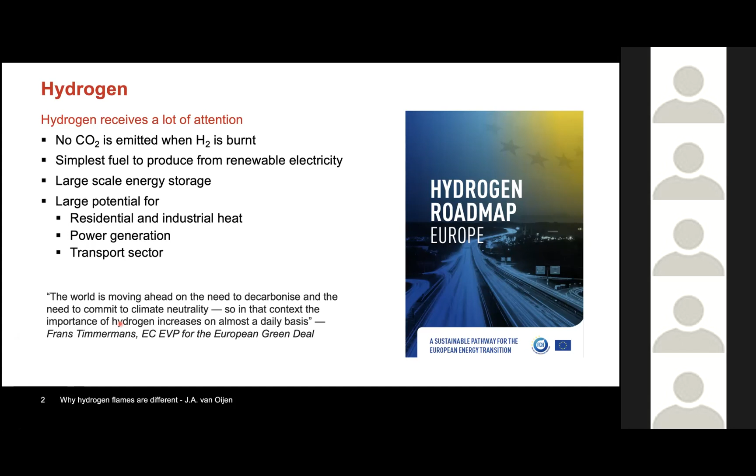His quote is down there on the slide - let me see if I can use the laser pointer - saying that we need to decarbonize and go towards climate neutrality. Nice words, and the importance of hydrogen seems to increase on a daily basis. Even last week, the Dutch government announced their plans during Prinsjesdag, last Tuesday. You must have heard it if you live in the Netherlands.

In these plans, they have reserved quite a lot of money for hydrogen. There's a 750 million euro investment in the hydrogen backbone, so that we can build a big gas grid suitable for hydrogen, and lots of other money for electrolysis and for hydrogen storage in salt caverns. So it's picking up speed.

And of course, I don't have to explain that hydrogen receives a lot of attention, because if you burn hydrogen, you don't emit carbon dioxide. Of course, if you make it, you may produce carbon dioxide, so I have to consider that. But it's probably the easiest fuel to produce from renewable electricity, and therefore it's considered to be a good way to store energy. When the sun shines during the day, we hardly need electricity, so we can convert that into hydrogen and then use that for energy storage.

And hydrogen then has a huge potential. The use of hydrogen, of course, for industrial heat, high temperature processes, but even for residential heat where electrification is somewhat harder. Power generation and the transport sector, of course - planes, trains, automobiles, maybe. All of those could benefit from the use of hydrogen. So that's why we might do hydrogen combustion.

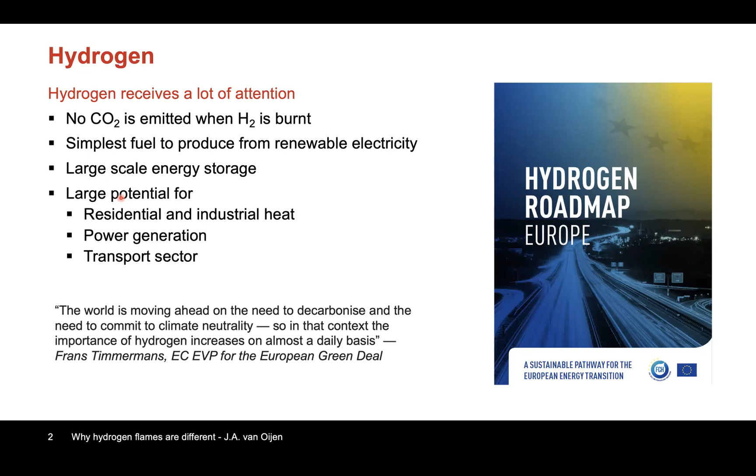But that was not the main topic. My buttons do not work. So, okay, this works.

Using hydrogen as a fuel, or as a partial replacement for fossil fuels - think about natural gas or methane - is a good idea, because then you can reduce the CO2 emissions per unit of energy. However, burning hydrogen is not that straightforward, because current existing combustion equipment might not be suitable. You cannot just simply replace that. Like a diesel engine, you cannot just pour in gasoline, and the same holds for a device that's designed to burn natural gas - you cannot simply replace it with hydrogen. I guess you all know that.

Some basic properties of methane and hydrogen as fuels are listed over here. Of course, their energy content, which is way different - hydrogen on a mass basis has a much higher energy content. However, it's also much less dense - density is much lower than methane. So on a volumetric basis, the heating value of hydrogen is actually lower than that of methane.

Three times as much. However, you also need much more air for methane than for hydrogen combustion. And actually, if you compute the energy content of a stoichiometric mixture, then it's about the same for both on a volumetric basis - so the same cubic meter of fuel-air mixture contains about the same energy. However, the ratios of fuel and air are completely different. So you can imagine that combustion equipment needs to be modified for that.

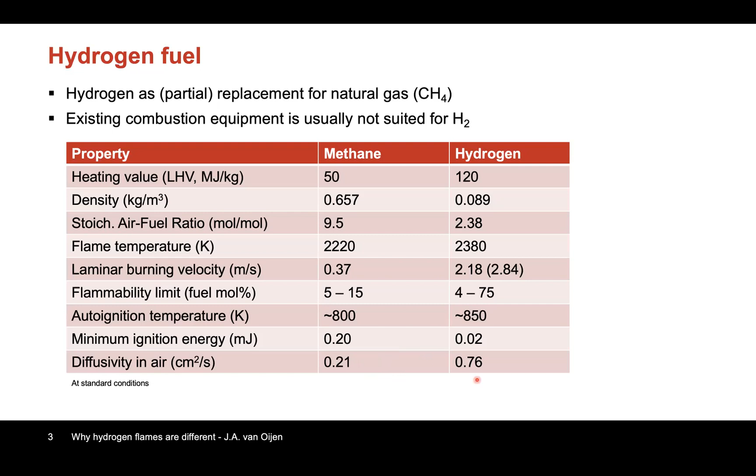So I'll keep struggling with this. Yes.

The flame properties, I mentioned already temperature and flame speed, and these are the main properties for premixed combustion, because these properties depend on the fuel equivalence ratio, the ratio between fuel and air. Highest temperatures occur near stoichiometric conditions, and it's about 150 K higher for pure hydrogen. But that's good, high temperatures mean high heat transfer.

That's nice for some processes, but of course, high temperatures also cause high NOx formation rates, and that's not nice because we don't want NOx emissions.

The flame speed is also vastly different, as I already said. Here you see the measurements and modeling results for the laminar burning speed of hydrogen, methane, and a mixture of hydrogen and methane. What we see is that we can burn hydrogen much faster, and that's nice because if it burns fast, you can produce a lot of power.

So a high power density. In a small volume, you can convert a lot of fuel. However, it results also in flame stabilization problems. Keeping the flame where it's supposed to be, that becomes the trick.

We will look a lot at mixtures with 40% hydrogen, and you see that that already enhances the flame speed, but it's not linear. 50% will be about here, and then there's suddenly a big jump. So above this percentage, the combustion properties really start to change, although 40% is already showing a lot of different behavior.

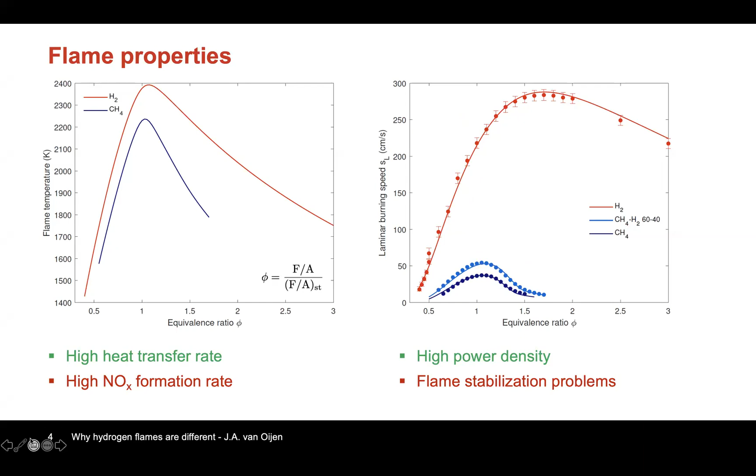Yeah, this is also a classical slide, but I think it's good to show you anyway. There are always many ways how you can burn fuels.

There are typically two modes of combustion: non-premixed and premixed combustion. In non-premixed flames, the fuel and oxidizer enter separately. What then happens is that you have to mix the fuel and air, and this mixing is rate determining because the chemistry is extremely fast. You get a flame front where the stoichiometric ratio occurs, high temperatures happen there, so we get high temperatures and therefore also high NOx formation rates.

So typically this process is a bit slow because it's mixing controlled, and it's also very hot, and therefore we have long residence times, high temperatures, lots of NOx.

So very often what we see nowadays are premixed systems. In premixed systems, you can mix the fuel and oxidizer beforehand, and therefore you can get conditions where the ratio is lean, so we have an excess of air. We are on the fuel lean side, where the temperatures are much lower than at stoichiometric conditions, so you can prevent NOx formation that way.

However, we have an explosive mixture. Fuel and air are already mixed on a molecular level, so they can start reacting right away. Therefore, you get a sort of reaction wave that has a flame speed, and keeping this flame front at the location where you want it, not somewhere up here, which would be flashback, or somewhere down there, which would be blow off, that's the trick in lean premixed combustion: flame stability.

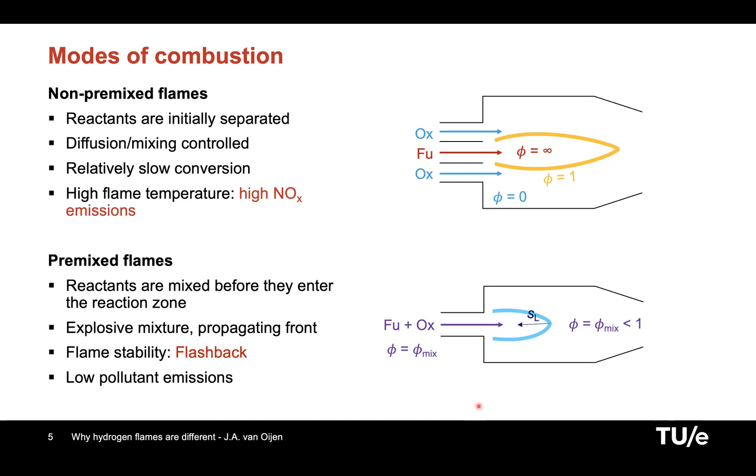So it's time for some theory. I would not say this is flame stretch theory for dummies, but I try to make it as simple as possible, keeping the essential things in there. If you want to know more details, I can refer you to the book by Law, Combustion Physics, a very good piece of material, or to our own paper where we give a bit more detail, specifically for the work I'm going to show you in a minute.

So it's about the impact of the Lewis number on flame speed. We saw this high diffusivity of hydrogen. So how does that affect flame speed? Because flame speed is important for flame stabilization.

Let's see. Let's start simple. Premixed laminar flames, right? They are reaction waves that separate unburned gas from burned gas. The unburned gas, you typically know the composition. The burned gas, well, when it's adiabatic, you can calculate what that condition is. I will only consider deflagration, so constant pressure problems here, no detonations, because that's usually not happening in most combustion equipment. So let's focus on constant pressure problems.

However, these states do not tell us too much about how fast this flame front propagates, and that's actually what we want to know, the flame speed. And in order to say something about that, we have to analyze its internal structure. We have to realize that this is actually a reaction diffusion structure. So we have reactions and diffusion happening, diffusion of species, of course, fuel and air, oxidizer, but also conduction of heat.

What is characteristic for combustion or for flames is that the kinetics has typically a very high activation energy. That means the reaction rates go faster and faster when the temperature is increased, and this is a sort of accelerating process, right? So combustion releases heat, the reactions release heat, resulting in higher temperature, faster reactions, and so on. So you get an accelerating process with very high reaction near high temperature, and then suddenly it stops because fuel is gone, if you are in a lean condition. I will talk about lean conditions mostly.

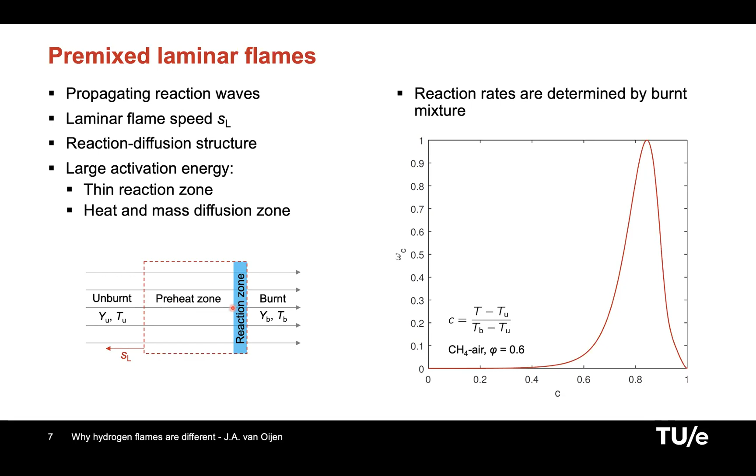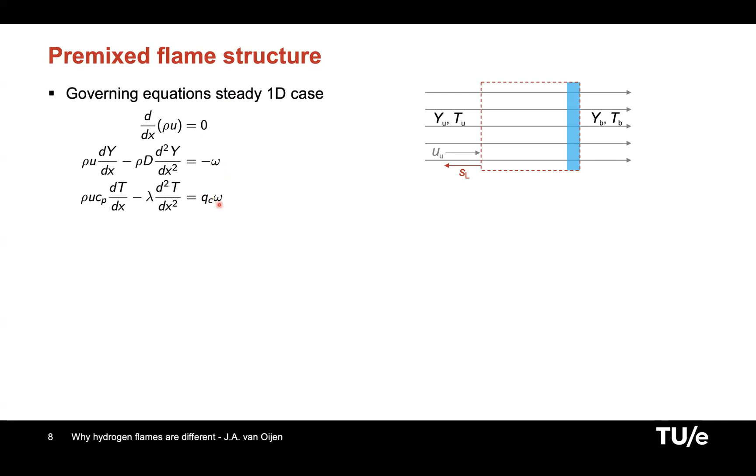Well, I can solve this. Yes, I can. It's not that hard if you assume that everything here is constant. This equation, solving that, means that the mass flow will be constant. This mass flux, rho times u, will be constant along the flame coordinate. Then using that in here gives you very simple solutions for the preheat zone, and my chemical source term I assume to be infinitely thin. Everything happens instantaneously over here at x is 0, the location of my flame front. So I get these exponential profiles for temperature and for the fuel mass fraction, with a typical thickness delta F, the flame thickness, thermal flame thickness, given by this expression.

And here I show the example for a Lewis number 1 fuel, because the Lewis number appears over here, and the Lewis number is the ratio between the mass diffusivity and the heat conductivity, so the mass diffusivity of the fuel. And if it's 1, then both these profiles have about the same thickness, as shown over here.

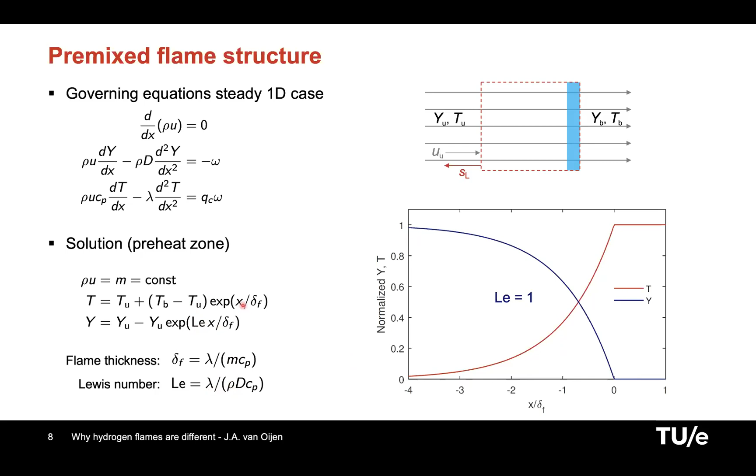Good. So now let's look at mass burning rates or flame speeds. So how much mass can we burn?

Well, you can do something that's called integral analysis. You integrate the governing equations over the flame front from unburned to burnt, so from here all the way to there.

Looking at these equations, if you integrate that from unburned to burnt, what you get is mass conservation, obviously. So what flows in is what flows out. And that is a constant, which we will call MB naught, where this naught, this 0, indicates that we are looking at a stretchless case.

Later, we're going to consider stretched flames. This is the fuel conservation equation. If we integrate that from unburned to burnt, then the diffusion fluxes drop out. And what we finally get is this equation, because also the mass fraction of the fuel at the burnt side is 0 - all the fuel is gone.

So we have these two expressions, which we can combine into one. And that says that the amount of mass flux through the flame front is equal to the amount of mass that we can consume in the reaction layer divided by the fraction of fuel coming in.

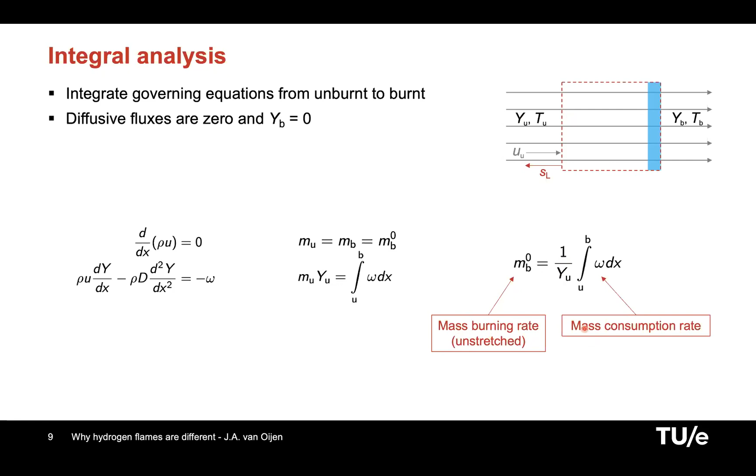So what does this mean? The reaction zone can consume a certain amount of fuel, and that fuel flows in over here, and of course the total mass is conserved, so total mass will also flow out at the back. This mass flow, this mass burning rate for an unstretched flame, is therefore equal to the mass consumption rate, the kinetics.

Now let's consider stretched flames. First, what is flame stretch? Well, flame stretch classically is defined as the rate of change of a flame element, or the surface of a small flame element. So I have my flame, and I have two examples here.

This is my flame, the blue thing, in a straining flow. And I can consider a little flame element here, a surface element, because this is an infinite flame front. By the flow here, it will be strained, it will be stretched. So this area will increase if you consider it in time. And that is flame stretch.

Well, flame stretch can also be caused by flame curvature. So this is another example where we have a uniform flow, but a curved flame. Also here you can consider a little element, a surface element. And because the tangential components of the velocity along the flame front here are in opposite direction, again this little curved flame will be stretched.

There's a third mechanism, that's flame motion, but I couldn't draw that. If you have a spherical flame, it grows, it is also getting bigger. The surface is getting bigger, so it's stretched. So that's flame stretch.

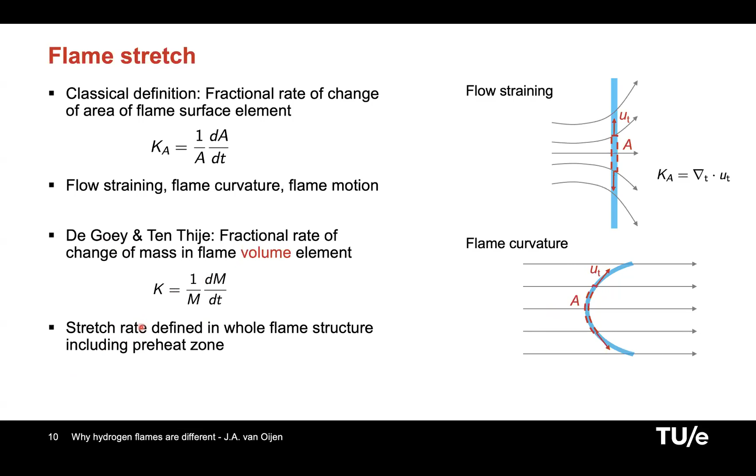So let's look at our simple strained flame configuration, a planar flame. I do not look at curved flames now, just to keep it simple. For a strained flame, the stretch rate is the divergence of the tangential components - this in the direction of the flame, along the flame. But also everywhere, not only there.

So I get a mass loss term in my continuity equation. Actually, it's dV dy. And if I look at the continuity equation and plug that in, I get this expression. So mass is coming in, but because of stretch, mass is flowing out in the direction tangential to the flame front.

Of course, this mass loss term is also present in the conservation equation for species. For my fuel, I have a similar term, which takes away fuel in this direction, planar, tangential to the flame front. Okay, so that makes my equations a little bit different.

If I now perform this integral analysis, I get very similar results, again MB minus MU, but now they are different. It's not conserved anymore, so the mass flux at the burned side is not the same as at the unburned side. In case of positive stretch, as shown here, obviously you can also have the opposite, but for positive stretch MB will be lower than MU, so the mass flux at the burned side is lower than at the unburned side.

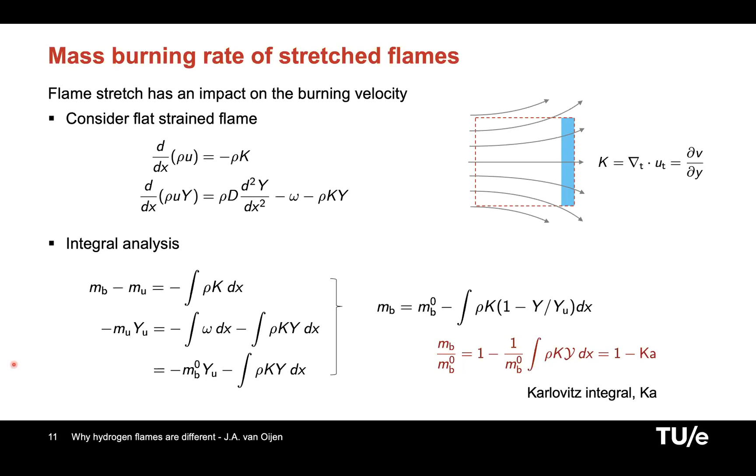I cannot see what happens on the right edge of my slides, it's a bit nasty, I can also not point over there, but that should be something like a Markstein number and a Karlovitz number over there. Well, not Markstein number, not right now, we're gonna do that soon. But because of that, I did not consider that. I did not talk about Lewis numbers, I did not talk about diffusivity. That comes now.

Because where does the unity Lewis number or the non-unity Lewis number effects come in? Then we have to consider enthalpy. Look at the enthalpy, so that's the sum of fuel and temperature, that's chemical heat and sensible heat, let's say. If we plot that for the unity Lewis number case, it looks like this. We can add those two up, and if you normalize this all conveniently, and I added a little separation here, you get a constant. It's purely constant in the unity Lewis number case, and the burned side equals the unburned side, of course.

However, for non-unity Lewis number cases, this profile changes. Fuel profile, lower Lewis number, let's say for hydrogen it's 0.3, so we get a much wider profile here. It diffuses much more, so we get a bigger thickness over there. If we then add these two up, you get a dip here.

Yeah, there's already fuel disappearing, but the temperature is not rising yet, so that means the enthalpy is going down locally. However, at the end it will be constant. It's of course conserved, doesn't change.

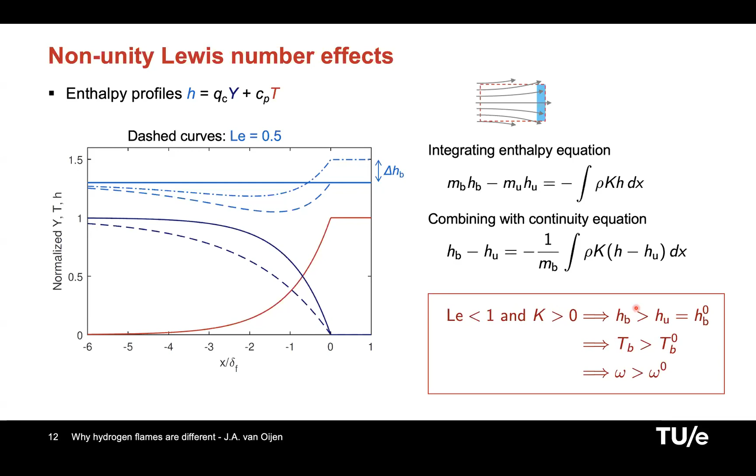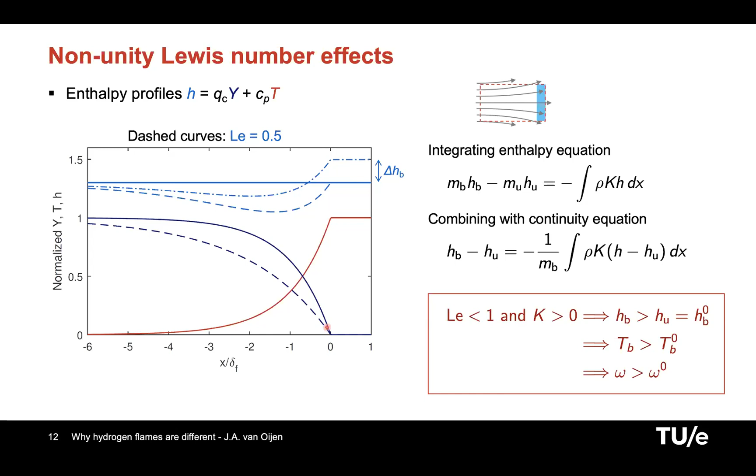And an increased enthalpy, of course, means an increased temperature, which I didn't draw here, but this increase would also result in a higher flame temperature, and higher flame temperature means directly that this source term here, where the reactions occur, feels higher temperature, so we get higher reaction rates. Higher reaction rates means higher consumption rate, higher MB0, higher consumption rate.

So this story not only applies to the enthalpy. In general, we have many species and they all have different Lewis numbers, typically not one, and therefore also the elements are not conserved. So the amount of carbon or hydrogen or oxygen in the flame, which are conserved by chemical reactions, would be uniform, constant, but when stretch and non-unity Lewis numbers are there, also they can change. The element mass fractions, Zj, will change at the burn side, and that has also an effect on the chemical composition at the burn side of the flame.

The flame temperature will change. If you get more hydrogen, more fuel, more water, that has an effect on the chemical equilibrium temperature, the composition, which directly determines the reaction rate over there, right? The reaction rate was determined by the burnt side of the flame. So the mass consumption rate or the mass burning rate of a stretchless flame, which are equal, is a function of this burnt composition in terms of enthalpy and elements that determines the equilibrium composition, the burn side. So this stretchless rate depends on the composition of the stretched case.

So if you plug that into the mass burning rate, so this is the same expression as before, but now we're clearly expressing that this MB0, the consumption rate, the chemical activity of the reaction layer, depends on the composition at the burn side. Still, there is this Karlovitz effect, of course.

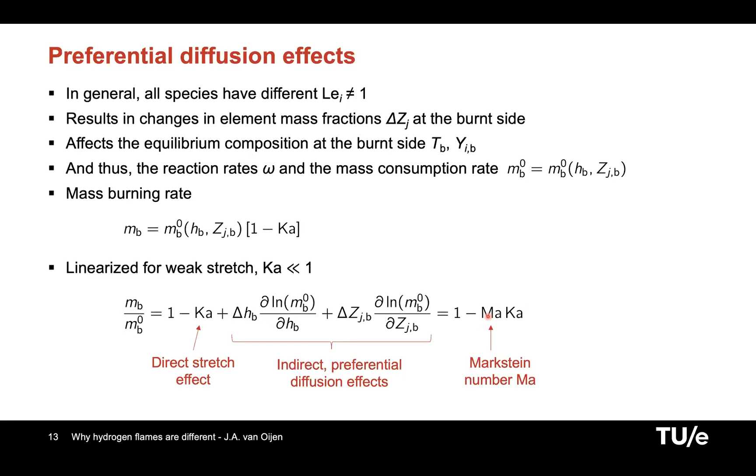So I can get a higher enthalpy at the burnt side that results in a higher consumption speed, and that's added to the mass burning rate, so you can burn faster. And here we have our Markstein number then. Yeah, so this was 1 without preferential diffusion for the unity Lewis number case, but when you don't have unity Lewis numbers, this Markstein number can change. That's given by these values.

So let's see how this works in practice. Look at a counterflow flame, stretched premixed counterflow flame, methane air. These are calculations, by the way. We have here lots of measurements, those calculations, but for different strain rates, low strain rate, high strain rate, and the theory nicely captures this.

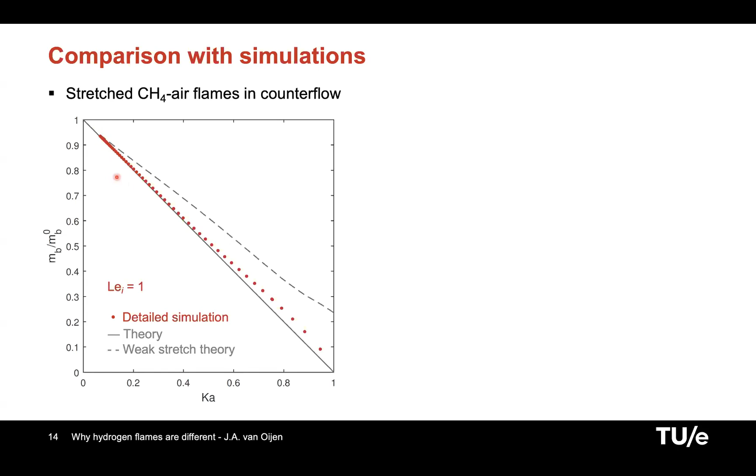So it seems to work. The weak stretch theory, that's linearization, is a bit less accurate for the relatively high strain rates. Notice that at this strain rate, the flame quenches, but here it looks very nice. Okay, this is for methane, unity Lewis number, slope -1.

Now we're going to add hydrogen. This is the pure methane case again. Now with Lewis numbers not equal to 1, and we're going to add hydrogen, more hydrogen, more hydrogen, because preferential diffusion results in a change in elements, and that results in an increase in the flame speed. This is for lean methane hydrogen mixtures in air.

What are these changes then? Here are the changes shown for this case, the 60% hydrogen. We have the enthalpy, which is going down, oxygen is going down a little bit. This is not only the change, but also weighted with their effect on the mass burning rate.

So this is the direct contribution in the MB0. But the biggest contribution comes from hydrogen, the element hydrogen. Actually the increase in the hydrogen content at the burnt side - and I'm talking about the element hydrogen because H2 is not there anymore at the burnt side - it's the element hydrogen that results in an increase in reactivity, typically because this results in a richer burnt composition, which has a higher flame temperature. Higher reactivity at the burnt side, higher mass burning rate, higher flame speed.

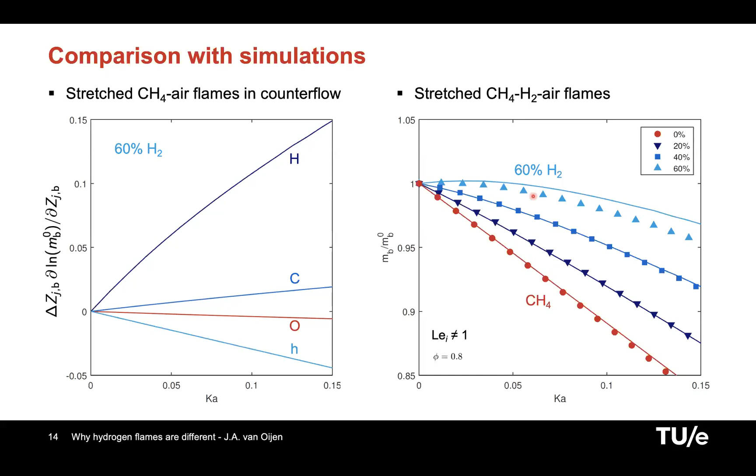And we see that now the flame speed is not decreasing anymore, but actually can even increase. This is an interesting phenomenon. We see here, again, this is the Markstein number. Typically it's positive, meaning that the slope is going down, but with significant amounts of hydrogen - and that happens for lean flames earlier than for stoichiometric flames - at a certain hydrogen fraction, the Markstein number becomes negative, meaning that this mass burning rate goes up with stretch and not down anymore.

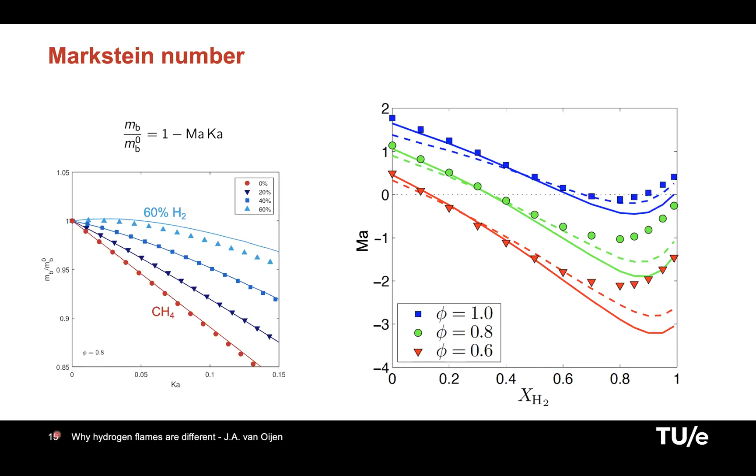And you say, who cares? Well, I do, and many flames do, because this stretch phenomenon is very important for the stabilization of flames. When this Markstein number becomes negative, actually what you then see is that you get lots of instabilities in flame fronts. Here you see experiments, pictures showing cellular flames. Why is that happening? Well, in fact, all flames that have a density jump are hydrodynamically unstable.

It's not so easy to explain, but consider if you have a flat flame and you now perturb it a little bit, put a little wave on top of that in shape. What you get is an expansion of the flow in front of the flame because of the acceleration here. The density jump causes an acceleration normal to the flame, and therefore you get a little expansion of a flow tube in front of the flame. So the velocity will decrease because of this expansion towards the flame front.

The velocity will here be lower than the flame speed. Hey, velocity lower, then my flame will start to move faster. So this bulge here will grow and grow and becomes unstable. However, this part of the flame is also stretched. It's positively stretched, right? We remember, flow in this direction, velocity. So this little part is also stretched when it grows, and positive stretch results in lower mass burning rate. So my SL goes down, so it can stabilize again.

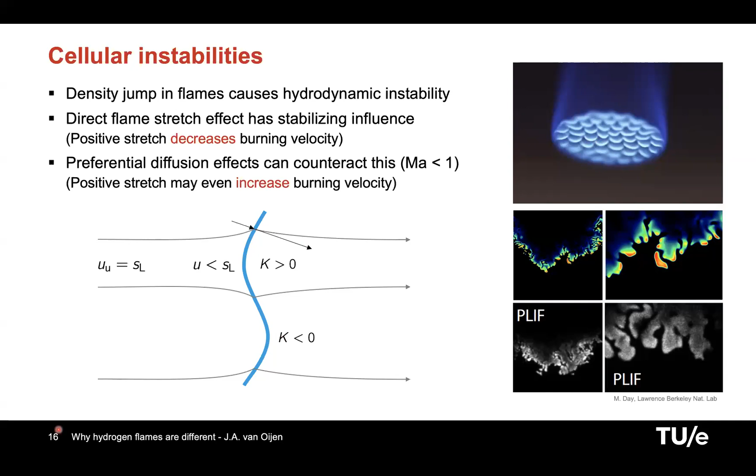And I get lots of these finger-like structures, little islands. Hydrogen flames like to be stretched. When they are stretched, they burn stronger. So you see a lot of cusps being formed because there they burn more intensely. And this has a bigger impact on flame stabilization.

Well, let's look at flame stabilizing on burners like this, where we have a metal plate with holes, a very simple system. Typically you have stabilization when the gas velocity equals the burning velocity. So if I blow in harder, my flame will adjust, it will get bigger to get a balance between gas velocity and flame speed. That determines stabilization. When these two are equal, then a flame can stabilize.

Well, you may say, if I look closely at this hole, at the wall of this hole, the gas velocity is 0. So the flame speed is always higher than the gas velocity, so it will flash back always. Well, that's not the case because the flame cannot burn very close to the wall. It loses heat and you get a little close-gap extinction locally. This is typically the size of a flame thickness.

So in order for this to propagate in there, the velocity at one flame thickness away from the wall is relevant. So the gradient of this velocity is relevant. And that's the critical gradient theory of Lewis and von Elbe. So at a certain low distance from the wall, typically a flame thickness, this gas velocity is important. How does it compare to the burning velocity? If the burning velocity is higher, it will flash back.

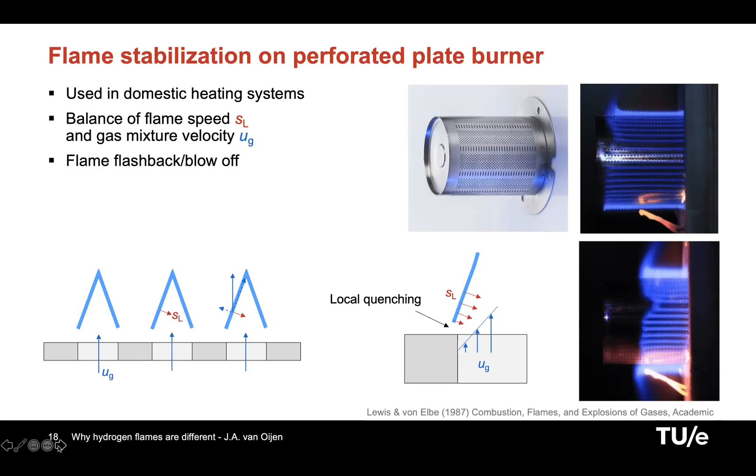So we did some experiments with methane hydrogen mixtures, mostly done by Yuri Shoshin. We compared mixtures which have the same flame speed, so for the same gas velocity you would expect similar flame shapes.

With increasing velocity, the flames get bigger. That nicely works for a lean methane flame. A methane flame with 40% hydrogen added also shows this increasing trend, but the shapes are different. You can clearly see more intense burning at the lower edge of the flame, where it is positively stretched. At the tip, with hydrogen, it's negatively stretched, actually compressed, since you have a curved flame in a flow like this.

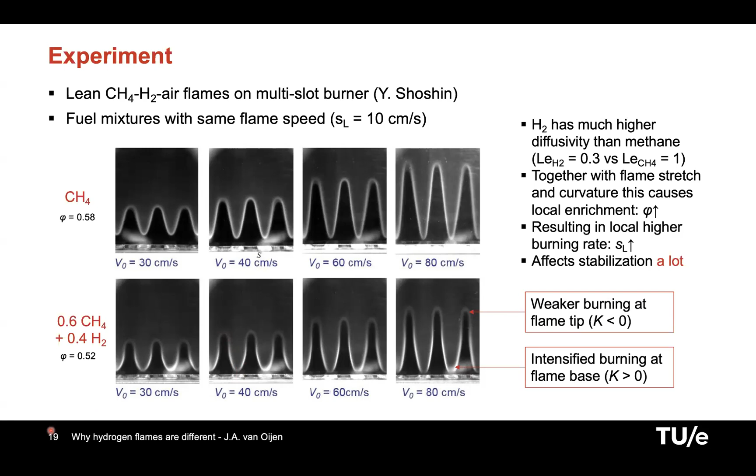So you get weaker burning at the flame tip and stronger burning at the foot, the base of the flame, and that changes the stabilization. It burns stronger at the foot.

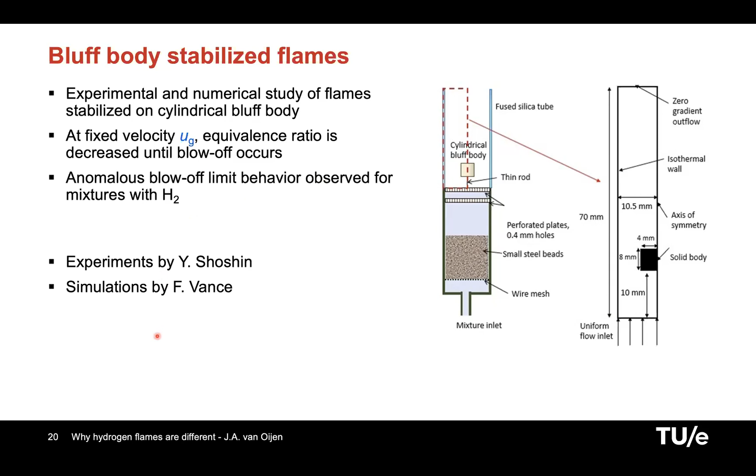To study this in more detail, we did a lot of experiments and numerical simulations on this configuration, a cylindrical bluff body, to study the flame stabilized on top of it. We looked at different inlet velocities and different equivalence ratios, to find at what conditions we can find a stable flame, and at what conditions it will blow off or flash back. Mainly blow off was studied here. Let's look at some results.

Here we see experimental and numerical results in very good agreement. If you use the same burning velocity, you expect the same shape, but for the hydrogen added mixture, it burns more intensely at the bottom, giving a somewhat wider flame.

Simulations showed similar behavior, giving us the opportunity to do a very detailed analysis of heat loss, flame stretch effects, and preferential diffusion here. It would be too much to go into detail now, but you can read the paper, published recently online, on all these phenomena that play a role.

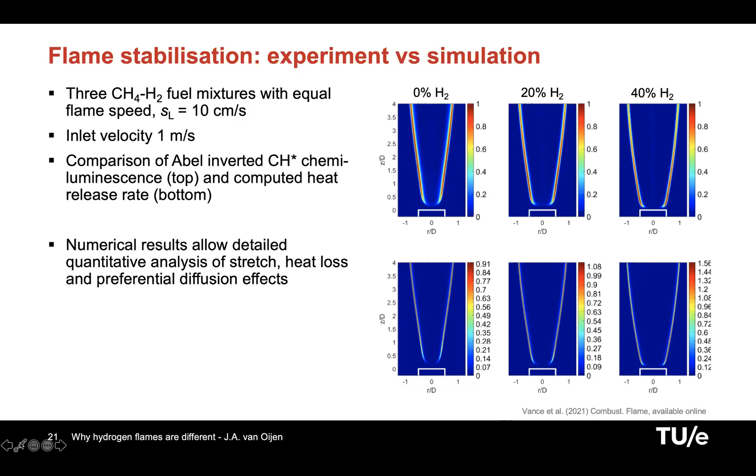So you have heat transfer to the body. An interesting phenomenon is that this heat is recirculated, but also this hot body attracts hydrogen. Hydrogen is sensitive to thermal diffusion - if this is hot, hydrogen diffuses towards the hot side. So you get a slightly richer condition here, more hydrogen, which helps stabilize the flame, or maybe even makes it burn too strongly, leading to flashback.

But let's look at blow off. What did we do? We looked at the limits - take an existing fixed inlet velocity of 1 meter per second, then make the mixture leaner and leaner. At some point, the flame will blow off. Here you see the flames that did not blow off, the lean limit flames.

Propane looks like this - it has a Lewis number much larger than 1. Methane has a Lewis number about 1. And here we go below 1. The lean limit flames look very different - you get these pencil-like flames, and they quench here.

While normal propane and methane flames just move upwards and blow away, here they quench. And what can even happen is that this flame over here stays alive.

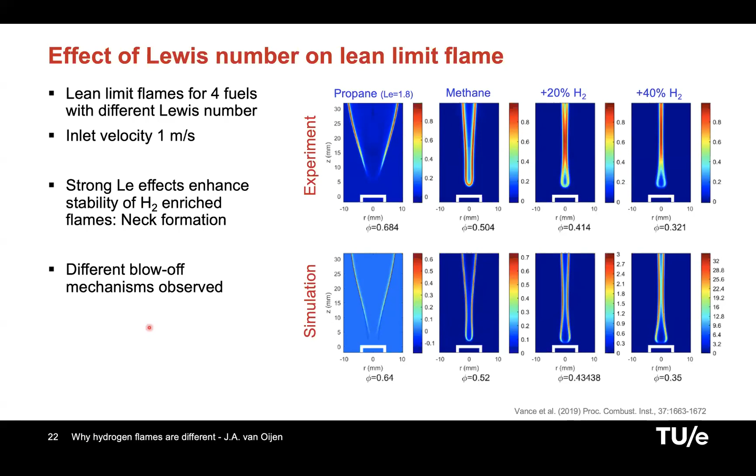Very lean conditions. If you would go back, it would reignite again, probably. So it also has technical consequences.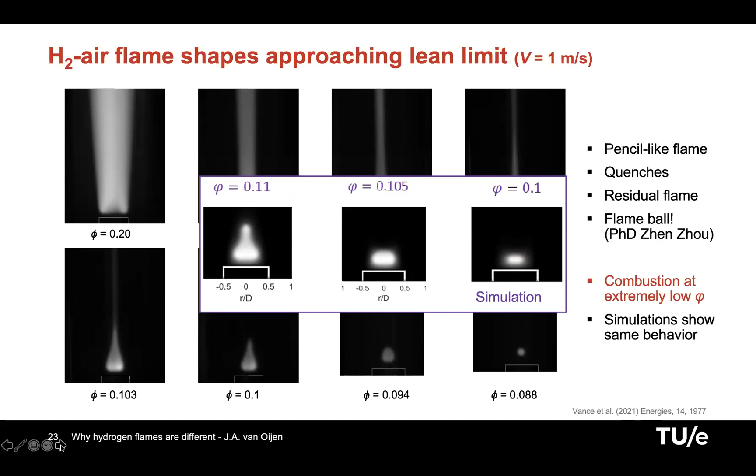But in general, very good agreement. An interesting phenomenon: these flames can burn in extremely lean conditions. But there's something more interesting probably. If you look at different velocities, you would expect that at a higher velocity...

...the lean limit is higher because you need a higher burning velocity. But for hydrogen, it's the opposite. If you do this experiment at 20 or at 40 centimeters per second, at 40 centimeters per second, you can go leaner. That's because at 40 centimeters per second, the stretch rates are higher, and this lean flame likes to burn at high stretch. It begins to burn more intense.

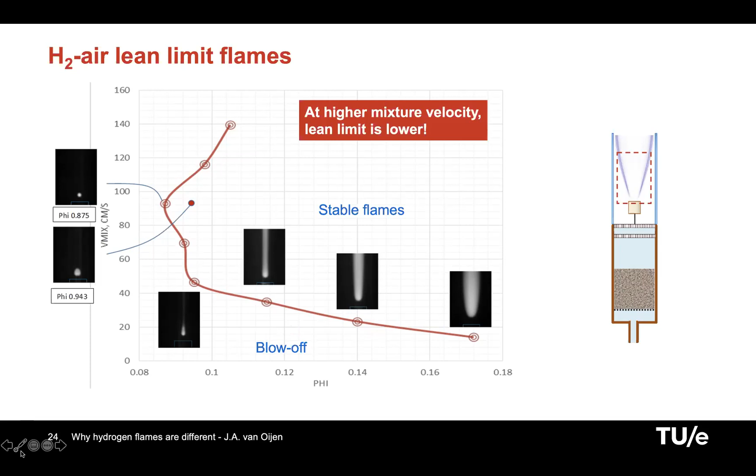So you get what we call anomalous blow-off behavior. It's directly opposite to methane or other natural gas, propane, etc. Other hydrocarbons show the same behavior. Very striking observation, and it was also seen in simulations, by the way.

Well, the other side is the flashback, of course, flames flashing back. This was blow off. Now look at flashback. We did simulations of hydrogen, a pure hydrogen flame on a slot burner like this. So 2D detailed chemistry, all the fancy work, whatever we can do. Then you lower the velocity, and at some point, of course, the flame flashes back. We see here the temperature for a lean 0.7 case. So this is how we then measure the flashback limit.

If we do this for different conditions, from stoichiometric to lean, we find at the limit similar shapes. However, it's clear that for the very lean case, there's a very strong preferential diffusion effect. It starts to burn much stronger near the base, actually about 3 times stronger than the stretchless case. So a flat stretchless hydrogen flame for this condition would have a heat release rate that is 3 times lower than this. So if you would use this theory between gas velocity and flame speed, you would find similar flashback limits for all, but here this preferential diffusion makes the flame flashback way earlier, at way higher velocities, because it's burning much more intensely there.

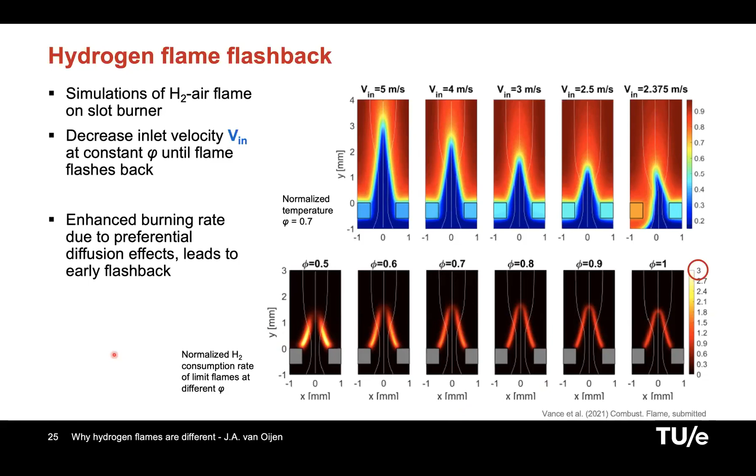Most of these simulations we did so far were steady, but we also tried some unsteady simulations, and then you see some interesting phenomena. This is a slightly wider channel, and what we did here is lower the velocity in a step. What you first see is this nice dancing flame, and then it's not deciding which side will flash back first, and then boop, it goes down. In fact, it stabilizes over here. So it's maybe more complex than what we think, and a good detailed experimental campaign comparing that with numerics might be needed.

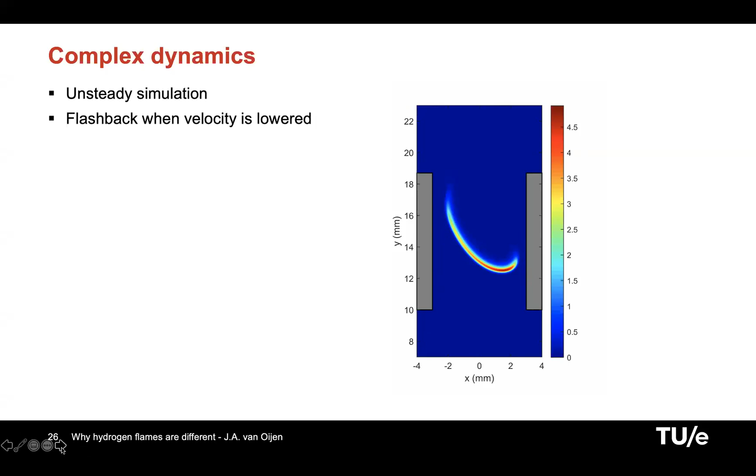Most of this experimental studies are dating back from the 80s.

Okay, what's a presentation by Jeroen van Oijen? Not about FGM. Well, I have 7 minutes or so to talk about FGM. Let's do that then in a very quick way.

FGM, of course, is a method for simplifying chemistry. Hydrogen chemistry is already simple, you would say, but still, if you would do these kind of 2D simulations, they take about a couple of days. And if we do hydrogen simulations with detailed chemistry in a full boiler configuration, it's weeks, even longer. So simplified chemistry is still needed.

And FGM is one of those methods. In FGM, what we do is we calculate 1D flamelets, store those in a table. We call that mathematically the manifold, basically saying that the chemical composition in a flame can be parameterized by one variable, the control variable. So we compute a premixed stretchless flame where we have a progress variable, which is typically a product of water or CO2, and here is the source term of that species. We tabulate that as a function of the progress variable. Then we can use that in the CFD code, the source term as a function of a progress variable, and solve this equation in the CFD code and look up the source terms.

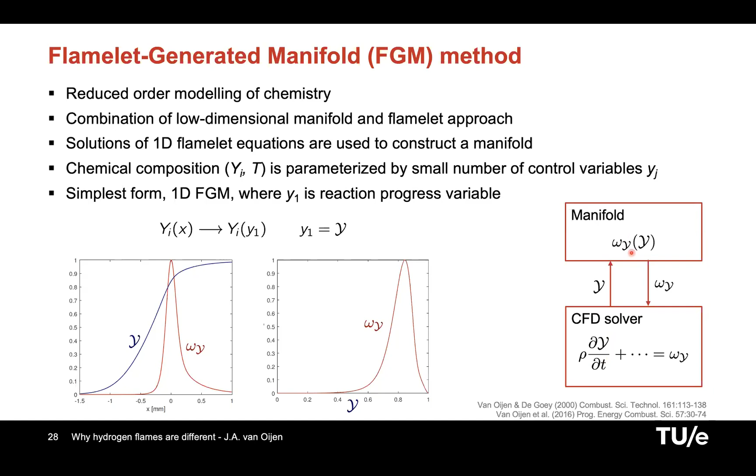Okay, this works very nicely. We've applied that to many cases, methane, lots of different fuels.

Often, however, we also have to account for effects that are not present in the 1D flame, effects like heat loss or variations in the equivalence ratio, in the stratification, in the technical application. Then you have to add these dimensions to the table.

So if you have heat loss, you have to add enthalpy as an additional dimension. You solve flamelets for different enthalpy, and store that in the lookup table as two coordinates: the progress variable and the enthalpy, which is now an additional control variable.

And you get a lookup table that looks a bit like this. Here's my source term of the progress variable, and I can couple it the same way and solve equations for these two control variables in my CFD code and look up the source terms in this table. Okay, that's the simple explanation.

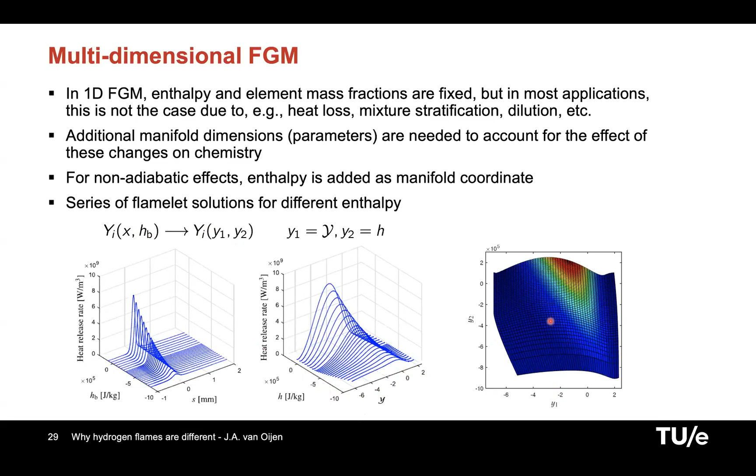Now, if we want to apply this to hydrogen, what should we do? Account for these variations that hydrogen causes. Hydrogen also causes variations in enthalpy in elements. These are the preferential diffusion effects. So we should include that in the table. 1D flamelets, the 1D manifold, do not have that, so we have to add it.

And you can do that in different ways. But the good thing is that for weak stretch, at least, you can show that these variations are linearly coupled. They are all linear in Karlovitz number, so they are also linearly coupled. And you can therefore combine all these variations into one dimension - you only need one parameter to describe this behavior.

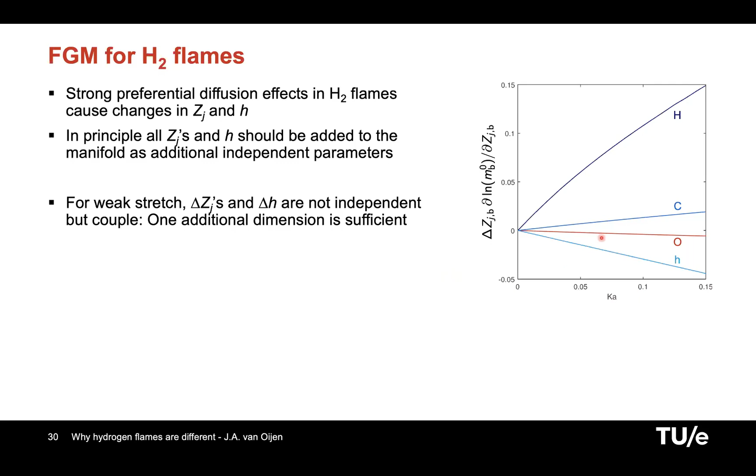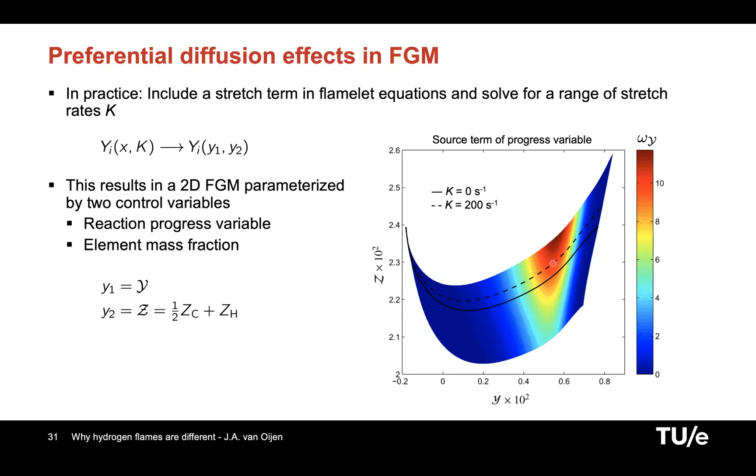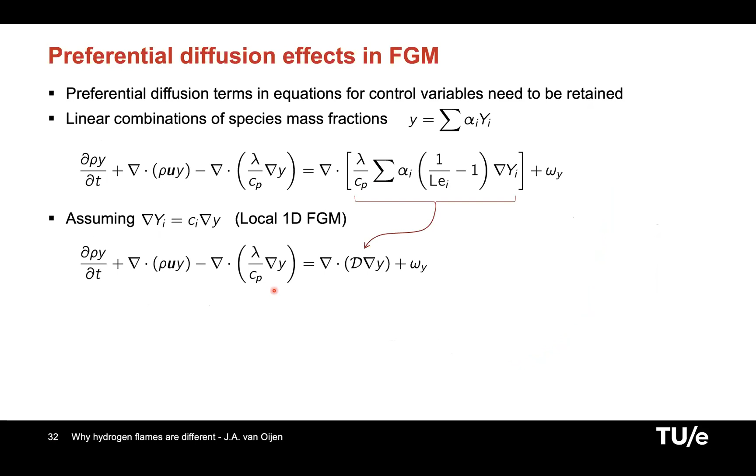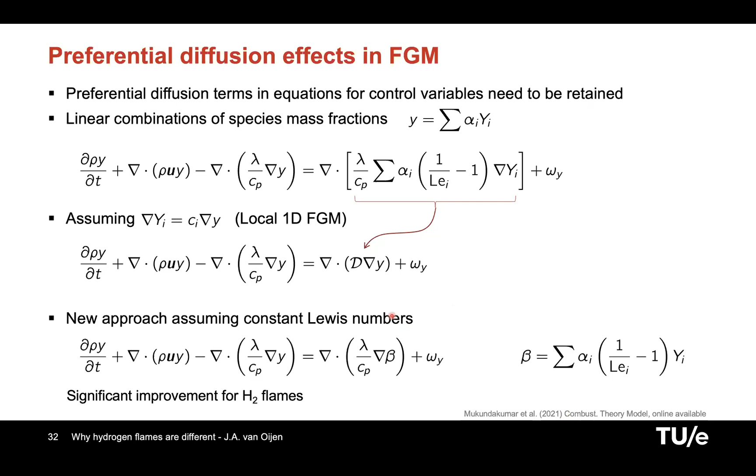So we have to include these terms also in the transport equations, and I will go quickly through this in view of time. We have to model that term, and we can do it in different ways. We recently introduced a new one very suitable for hydrogen flames, because it also includes transport tangential to the flame front. That's explained in a paper recently published online in CTM, which I can recommend reading.

So we can test this in stretched flames again, like we did before. Here you see the detailed simulations, the mass burning rate going up for positive Karlovitz numbers. With a 1D manifold, there are no stretch preferential diffusion effects, so we only get the direct effect, meaning mass burning rate goes down.

But with preferential diffusion in a 2D manifold, we can nicely capture this - burning velocity increases, and the exact details of how this 2D manifold is created is not that sensitive, as long as the variations in element mass fractions and enthalpy are present in the right way.

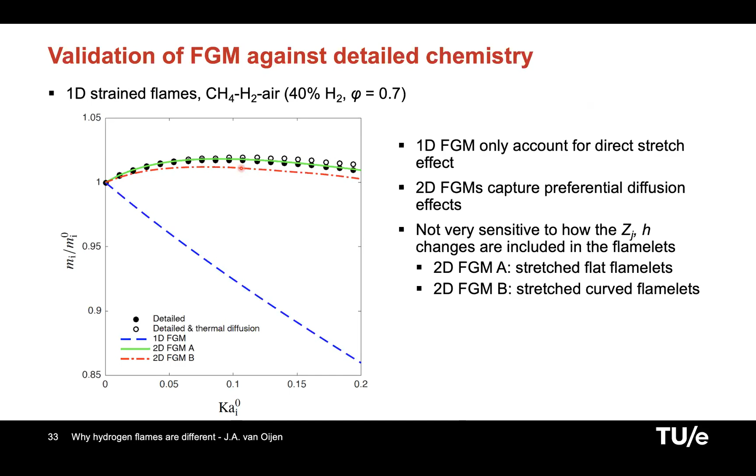So we apply this also in DNS of this mixture, 40% hydrogen, lean case, in spherically expanding flames - well, actually cylindrically, because it's 2D, since detailed chemistry simulations are pretty expensive. So 2D is already hard.

And if you then do that with FGM 1D, you miss this preferential diffusion effect. If you do that with a 2D manifold, you do capture these phenomena - you get the intense burning in the fingers that are formed.

And maybe the biggest gain here is that we get almost the same result, but then 200 times faster than here. That's why we do FGM, right? To make it faster.

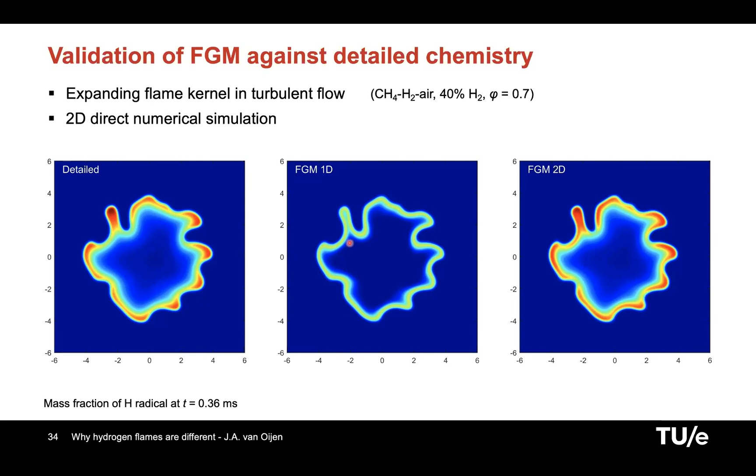These simulations were still strongly affected by the initial turbulence that is there. I put a spherical flame in some turbulent field, and therefore these develop more or less all the same. But if you want to gather some statistics, you have to run longer.

That's why we did this case, a Bunsen type flame, a DNS simulation with FGM. Here, the premixture comes in the slot burner, and there's burnt gas coming along, and you get this kind of simulation. You all have seen this simulation because you have visited the website of the Dutch section of the Combustion Institute.

We did this case with 40% hydrogen, using one-dimensional FGM, which does not predict Lewis number effects, and with a 2D FGM, which does have the Lewis number effect. So it can predict preferential diffusion, and it can predict intense burning in regions that are convex towards the unburned side. So you get increased burning rate here.

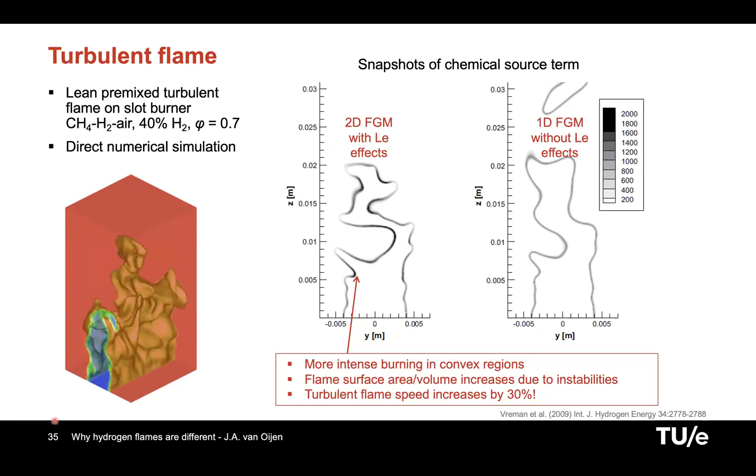What does that mean? This little flame front area grows and creates more and more flame surface. That means a higher flame surface density in this area, means a higher burning rate, turbulent burning rate. In fact, what we found is that turbulent flame speed increases by 30% for this mixture. That's significant, and of course we have to include that in our modeling or analysis of these flames.

It's an unsteady phenomenon, preferential diffusion, so it takes some time to set in, about one flame time scale, and that means very fast fluctuations in stretch - positive, negative, positive, negative - might be damped out. So very high fluctuating flows may have a damped effect.

Modeling this is a challenge because in DNS we can resolve that and capture this phenomena, but in an LES or RANS, this is all happening on the subgrid scale or unresolved scales, and you have to model it. You have to think about a model. That's a work in progress. Many people are looking into this, and we are trying to run DNSs of highly turbulent flows to study these phenomena and then come up with models that can be applied on a larger scale, like LES.

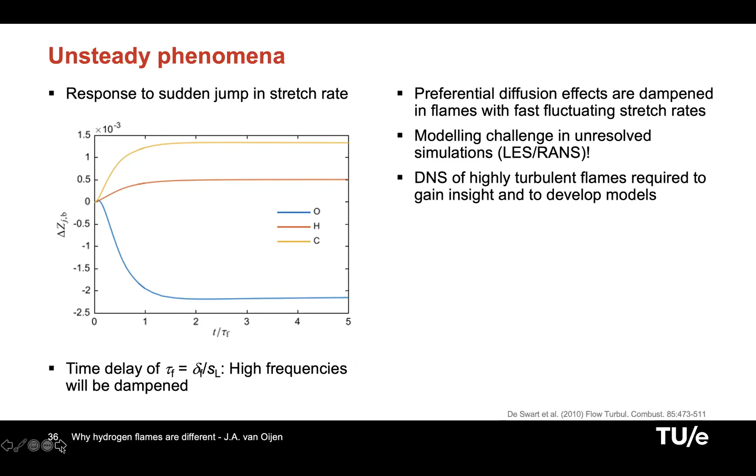Final slide. I'm running a little bit out of time, but I hope you can still stay with me. Some other modeling challenges: I started the whole story by saying that flames are thin, that we have high activation temperature and a preheat zone which is rather inactive. For hydrogen flames, that's not the case.

Hydrogen flames, if you look at the heat release rate versus progress variable, hydrogen burns everywhere. It has a hydrogen production, hydrogen radical production layer at the high temperature side. That's the same as in hydrocarbon flames.

But the hydrogen radicals diffuse upstream, and there they react with the oxygen. That reaction can actually happen almost at room temperature, and it's an exothermic reaction, highly exothermic. So you get a lot of heat being released at the leading edge of the flame, very close to the unburned side.

And that results in flames not being thin. So the whole theory should be reconsidered maybe, or extended to account for this.

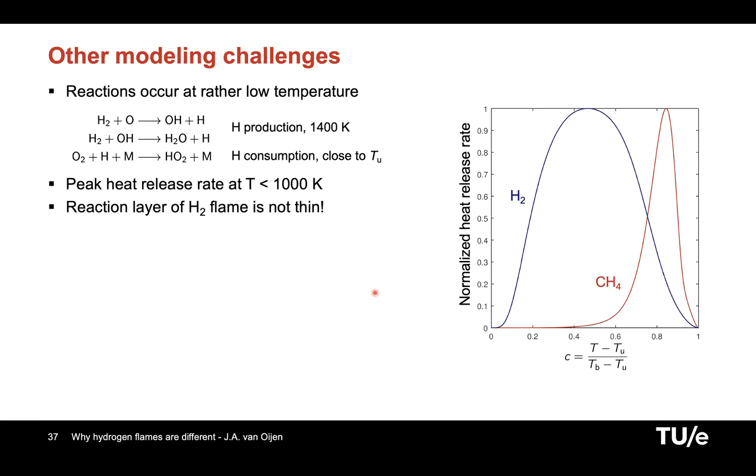For FGM, it also causes some problems because high burning rates close to zero progress variable means your flame gets very sensitive to little perturbations here. But there's something else: the source term over here depends strongly on what happens a little bit further downstream, because the hydrogen radicals produced here diffuse upstream and cause a lot of reactivity over there.

So it's not local anymore. Therefore, when a flame is cooled at the burnt side, there's no radical being produced, there's no activity over there. But in a flamelet where I have a constant enthalpy level, there will always be activity. This results in an overprediction of the source terms here in the leading edge, and that may result in way too high flame speeds and a very early flashback if you would study flashback on these burner flames like we did before.

So we have to solve this. Actually, we have already ideas on how to do that, but that's for the next presentation. I want to thank you for your patience. This is basically a summary.

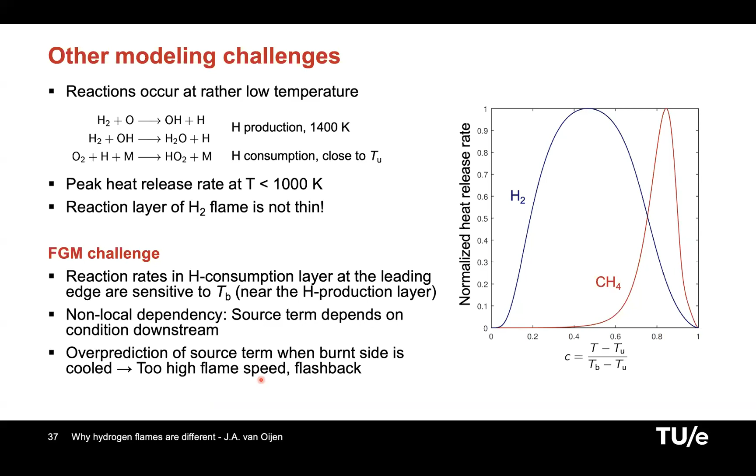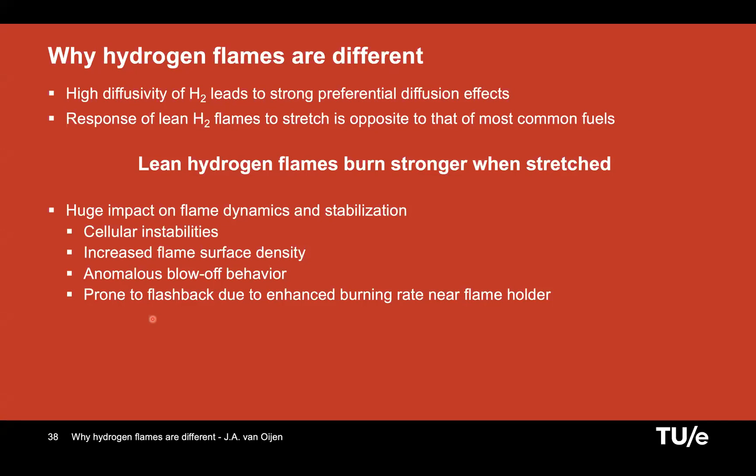Highly diffusive hydrogen - therefore we get very strong preferential diffusion effects. Hydrogen flames burn stronger when stretched, they like to be curved and stretched. This results in cellular instabilities, increased flame surface density, anomalous blow-off behavior, and very prone to flashback. That's in a nutshell what I've been trying to explain to you.